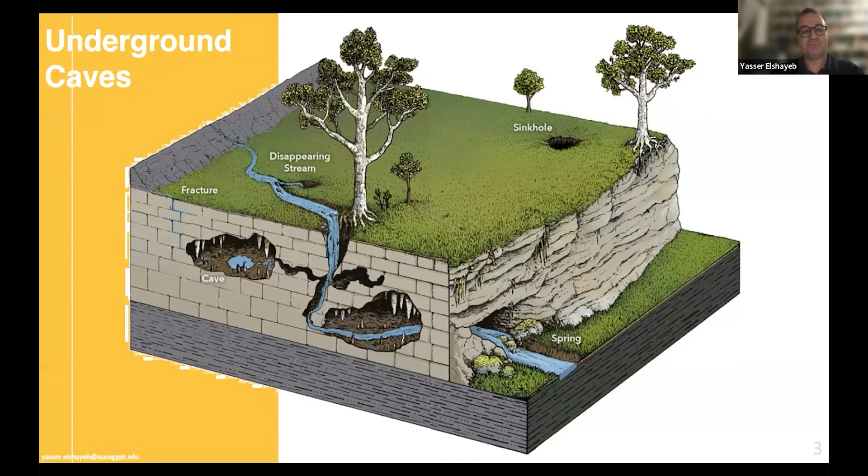There's nothing special about it, but the main characteristic is that it's done naturally. There are natural geological processes that lead to the making of caves. I'm putting some photos here, and if you've studied geology, you've probably heard of stalactites and stalagmites, which are calcium carbonates formed in those caves naturally with the effect of water.

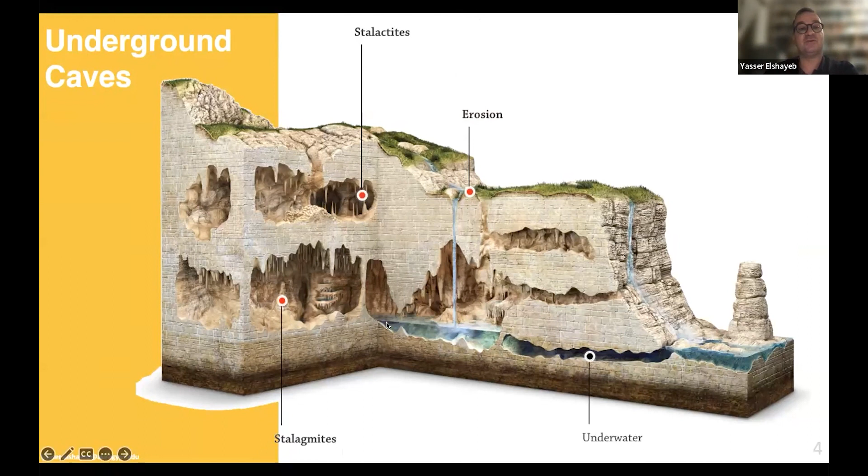I'll show you some real pictures of those stalactites and stalagmites from Egypt. This photo is taken in one of the caves we have in Egypt, in the governorate of Beni Suef, about 150 kilometers south of Cairo. This cave is called Sanur Cave. It's naturally formed, underground, and big, which is why I'm putting my photo here to give you an idea of the size of that cave.

Here I am standing inside that cave to show you the scale. You can see the stalactites coming from the roof, and the stalagmites from the ground. Actually, they're not coming from the ground - they form because water drips from the roof onto the ground, and while dripping, it carries small, nano-scale fragments of carbonates. Those carbonates are deposited one after another, and eventually you get this formation we call a stalactite.

Sometimes the water is actually dripping onto the ground, and when it drips there, the water evaporates or dissipates, leaving small portions of that carbonate material it carries, and it builds up until it forms that stalagmite.

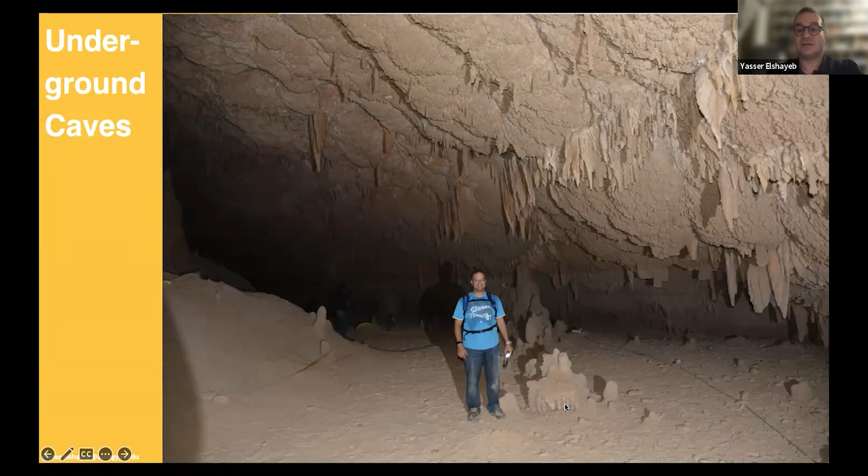I think I have another photo - yes, this is another photo of the same cave, and you see clearly the stalactites, and if you observe well below, the stalagmite. This is a natural reserve we have in Egypt. In other countries, like Lebanon, there's a cave called Jaita where you can go inside and look at it - there are lightings and a tour you can take, and it's really very nice to be there.

Again, I insist that it's always naturally done - it's not man-made at all. These are more photos from the Sanur cave in Egypt. We also have a phenomenon here called a sinkhole, where there's a cavity in the ground, and all of a sudden the bulk of the ground falls below. This can be very dangerous. Here, luckily, we're inside a cave in a remote area where no one lives, but sometimes sinkholes happen because of cavities and

they destroy homes and property. If you search Google for the word sinkhole, you'll find a lot of photos, many very frightening, big or small sinkholes, and it's actually problematic - it's a result of the existence of a cavity below the ground, so the ground just falls into this hole, if we can call it that.

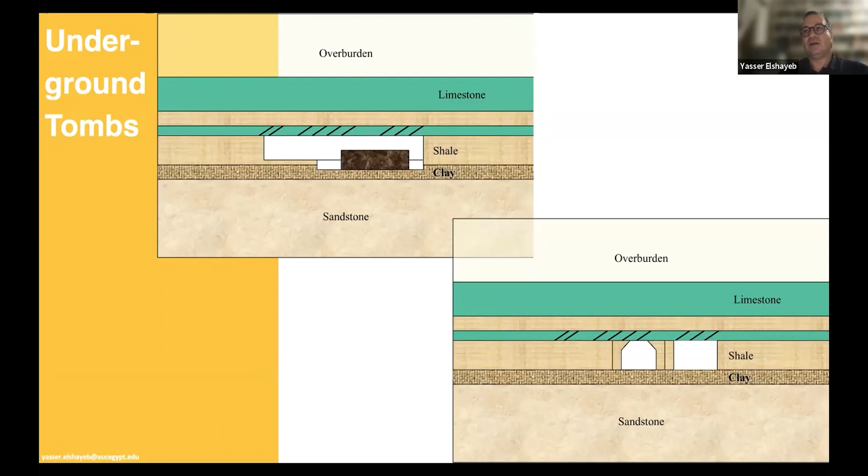So the main difference between a tomb, or cultural heritage tomb, and a cave is that the tomb is man-made. It has a definite structure, we know about its structure, while a cave is naturally made, so usually its structure is more or less following a random form, I would say.

Now, how to assess? This is another photo of a tomb in Egypt, and this is a third photo. As you can see here, it's going a little bit deep, and if you look here, this place is deeper than this place. Maybe it's like 30 or 40 meters below the surface. Nevertheless, it's still very stable, and people can go in and visit and admire the colors and the paintings on the walls, and so on.

Now, this is what exists, and this is the domain that I'll be trying to speak about today: how to assess the stability of those structures.

I've been into the Sanur cave, the Jaita cave, the tomb of Ramses I, Ramses II, whatever. But the question I usually ask as an engineer is how to assess, how to make sure that this structure is stable, that it will not fall on me, will not fall and destroy me, or kill me, or destroy anything that I put there.

It will not fall and destroy everything that is in there, and destroy the property and the paintings and everything. So this is the main question that we are asking.

If you remember the lecture from last time, we spoke about the problems facing structures. I'm putting here some of the elements that affect the stability of an underground structure. So we have groundwater, which definitely affects a lot the stability of the rocks around this opening. You have the joint persistence. You have the strength of the rocks that are around this opening.

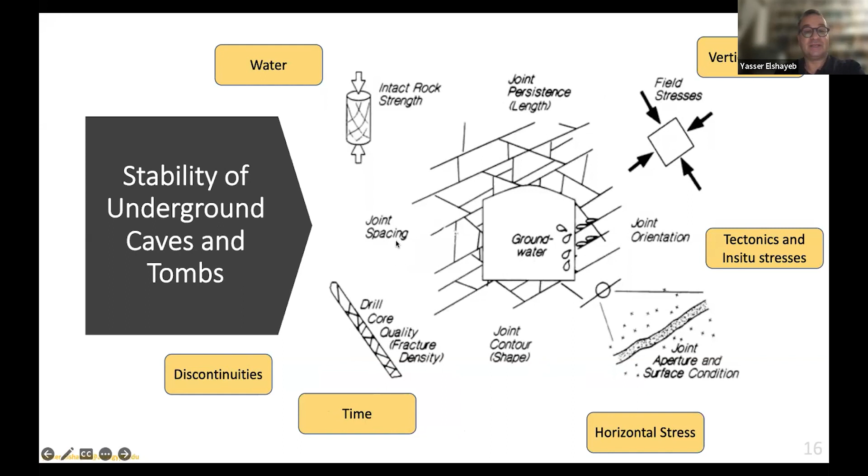You have the joint orientation, because if you have layers and joints that are inclined to the opening, it's more dangerous than layers that are more or less horizontal. You have horizontal stresses resulting from tectonic activities. You have generally the discontinuities of the rocks that are in here. And then you have also time, which I spoke a little bit about in the last lecture.

Now, another thing to consider when speaking about an underground structure is how wide it is, what is its height, and how far is it from the surface. So here we speak about the thickness of the overburden, which are the layers that are above this opening.

Sometimes we speak about underground structures that are 5 meters from the surface. Sometimes we speak about underground structures that are like 100 or 200 meters from the surface, and still we are able to build it and go into it.

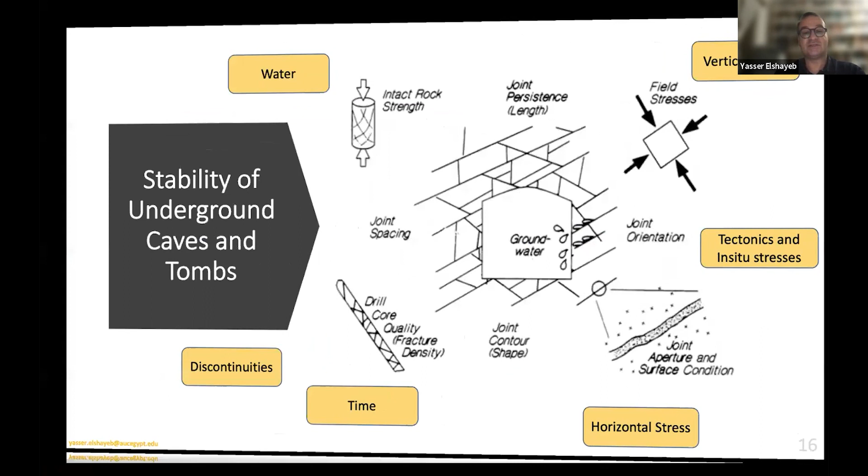Now, we need to consider as well the width of the cavity, or the tunnel, or the tomb, and also the height of that cavity, tomb, or tunnel, because all those parameters, in addition to those in the slide before, are actually affecting the stability of that underground structure.

And usually when you dig a tunnel or a tomb inside a medium of rock, you have stresses, you create additional stresses subject to this opening. And usually the question is, will this structure, without any additional support, support or bear the stresses or forces acting on it or not? This is actually the problem of stability.

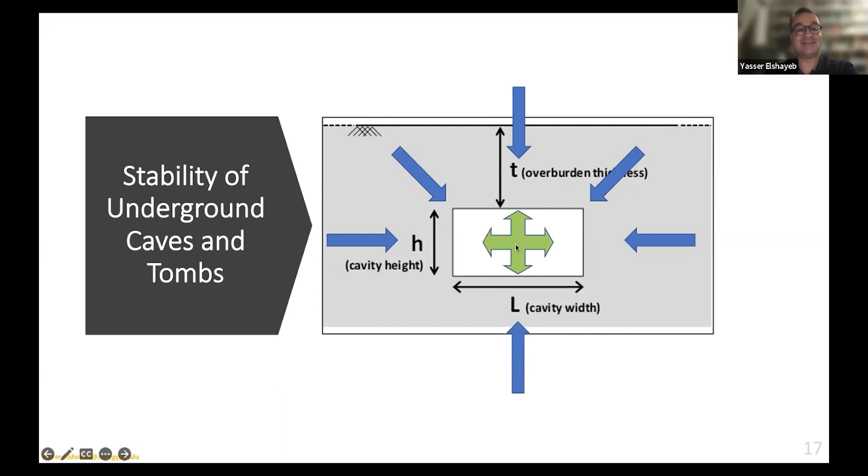So we're speaking about forces that are acting on an opening, and we're speaking about resistance that we put there, or the natural resistance or artificial resistance. And we need to make some calculations. So we need to calculate the forces, and we need to calculate the resistance that you are putting in that place.

When the force acting on the opening is larger than the resistance, this means failure. If the force is equal to the resistance, this means equilibrium, almost there. And if the force is less than the resistance, then this means stability. So those are the three cases that we usually have.

Since we cannot really control the forces that are acting on any underground structure, because it's nature, it's layers, it's the water that exists, it's the discontinuities naturally there, what we can actually control and try to enhance is the resistance. So if you find that the forces acting are larger than the resistance, you need to increase your resistance in order to make your structure stable. If not, you know that it will fall.

If you find that the resistance you have is naturally larger than the force that's acting, meaning the force is less than the resistance, then you have nothing to lose, nothing to worry about. It will be stable, there will be no problem. And this is actually what we use in the stability of those structures.

So you calculate the weight of this mass of rock, and this is the force acting on this opening. Now, if you calculate this, and you know how much the rock can resist, can support, can take on itself naturally, then with the difference between those two, you can work on the equation I spoke about before. Now you have the force and you know the resistance, so you can deduce if it will be stable or not. This is an analytical method invented by Professor Terzaghi in 1943.

Of course, it has a lot of details you can look at in the literature, to see how it is applicable. Now, this is a continuation of Terzaghi's theory: if the distance from the surface to the opening is higher than a certain threshold, then you don't actually calculate the weight of everything - as before, you'd need to calculate the weight of everything above the opening, with this inclination and everything. But this applies when the distance between the opening and the surface is empirically about 5 times the opening size.

So if the opening that I'm putting here is like 2 meters in height, and this opening is situated 10 meters below the surface, then I need to calculate everything. If this opening is 2 meters in height, but it is situated at a depth of like 50 meters below the ground, I will not calculate everything.

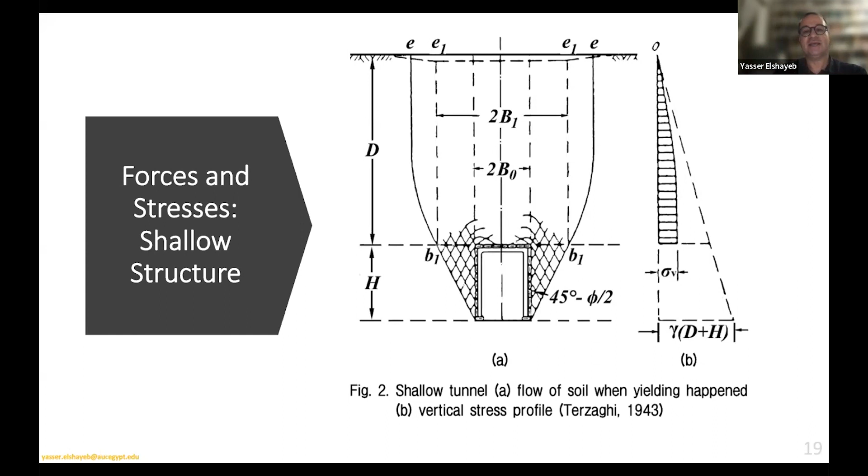So we have made some studies, we have enhanced this cone. It's actually not phi over 2, it's actually phi over 2.01 or something, because with time, with development of science, we are able to enhance those equations, and we are able to come with maybe better estimates of the forces and the resistance. But if you will calculate it with the cones of Terzaghi, you have a very good and fair information that you can really work with.

To be blunt, this is the result of 30 years of research separating Terzaghi, this one is 1973, from this one in 1946 or 1943, the one that was before. So in 30 years, we came up with an enhanced equation, an enhanced shape based on other research. And this is usually what happens in all fields of research. You have something that is very old, done in 19 something, and then with time, you make other research, you enhance the equations, you have better equations, and so on and so forth.

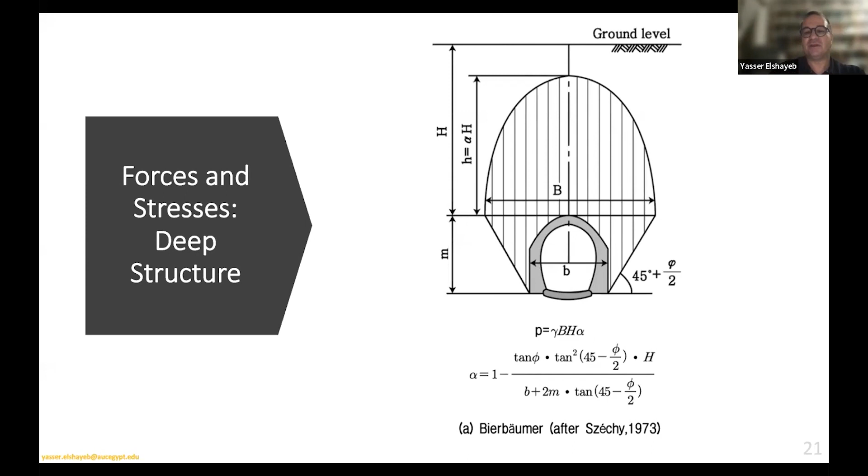So this is again the example of Széchy in 1973, cited by Bierbäumer. I think this paper is like 1980 something. And I'm sure that if you look into a book about rock mechanics and how to calculate the forces around an underground opening, published maybe in 2020 or 2022, you will find a slightly different equation than this one that is taking into account something more, and you can of course use it.

Now let me take you to look into some empirical methods and empirical models, because empirical models are easier to apply. You don't have a lot of mathematics to apply, and they are mainly based on experience. So you have very experienced people who have worked with underground structures, underground tunnels, underground tombs, underground temples, whatever, for like 30, 40, 50 years sometimes. And with their experience, they are able to derive some rules. That's why I call it empirical models, because you don't have a lot of equations into it with respect to what I've just shown you about Terzaghi and Széchy.

Now, the very famous empirical model for underground structures to calculate, to know if an underground structure will be stable or not, is a system that was developed in 1978, I think.

This was developed in the late 1970s by Professor Bieniawski from South Africa, who after 40 or 50 years of experience working with underground structures, derived this system called rock mass rating.

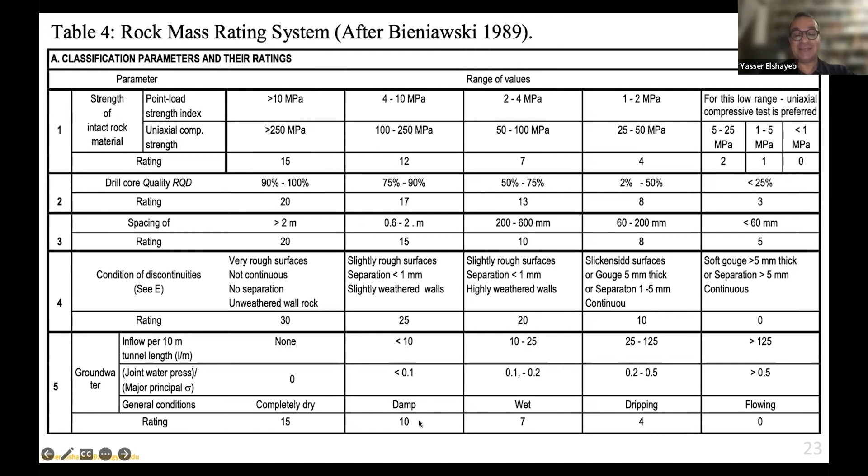Now suppose we had a rating of 12, a rating of 20, that's 32, then a rating of 15, that's 47, then a rating of 20, so 67, and then a rating of 10, so I arrive at the end at 77. So I calculated my rating for my environment as 77 rock mass rating.

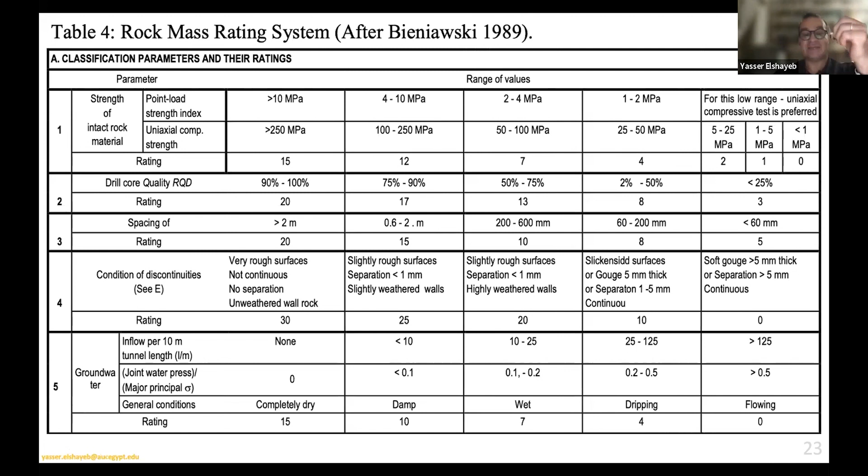So this 77 is a very important number that I will use in the slides that follow in order to know about the quality of that rock.

Here it says again, Bieniawski in 1989, that if your rock mass rating is between 81 and 100, we call this a very good rock. If it's between 61 and 80, like our case was 77, we call this a good rock. So what's a good rock? It means that if you have an opening of 10 meters width, you can advance this tunnel about 1 to 1.5 meters, and it will not fall.

It will just stay as is. And if you want to make rock bolting, then you can make support for the roof every 2.5 meters.

We also have this graph that says how much time my opening will stand. So if my rock mass rating is 77, as we spoke before, this is 60, this is 70, this is 80, so 77 would be like here. You draw a dotted line like this, and it will tell you that with an unsupported span of about 20 meters, it can stand for 10 to the power of 4 hours, which I think would be like months or something. So this means you can have an opening about 20 meters in width, and it will stand alone without any support for like months. Of course, if you want it to stand more, then you need to support it more.

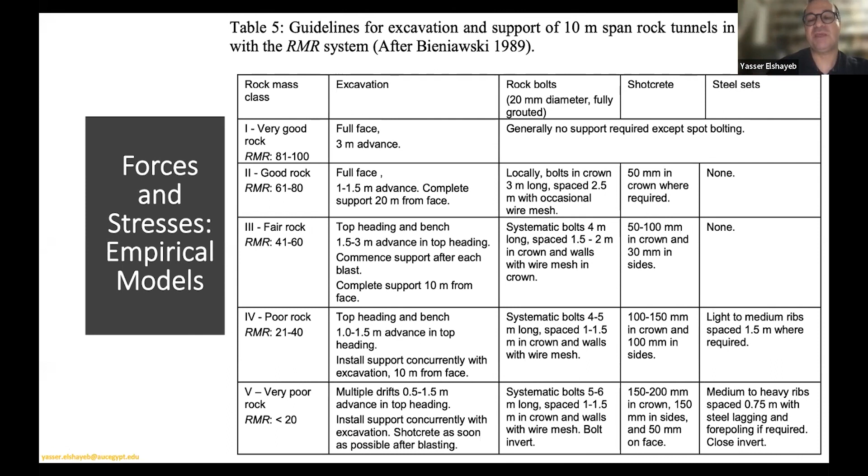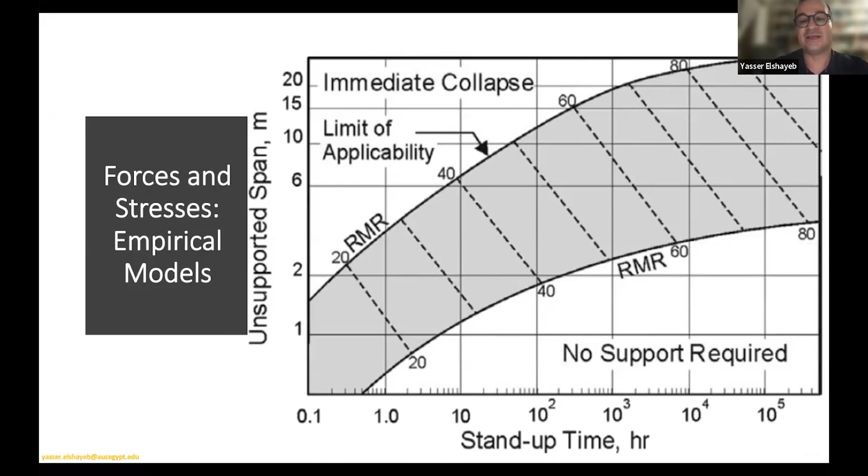This was Bieniawski in 1989, or 1985. From 1985, 1989 until now, a lot of enhancement has been done to this methodology, but it stays as one of the very established tools to assess how much time the rock mass will stay, and how big a span I can make in this place.

This is a different system established by another professor called Barton, who also established another system called the Q system. But it's the same idea - you make some calculations, some ratings, and when you have this Q rating, you can know if your rock will stand for how long, and under what conditions. Again, all of this is based on experience, years and years of experience. No equations behind it like Terzaghi or Szechy before, but here you have a lot of experience put into it.

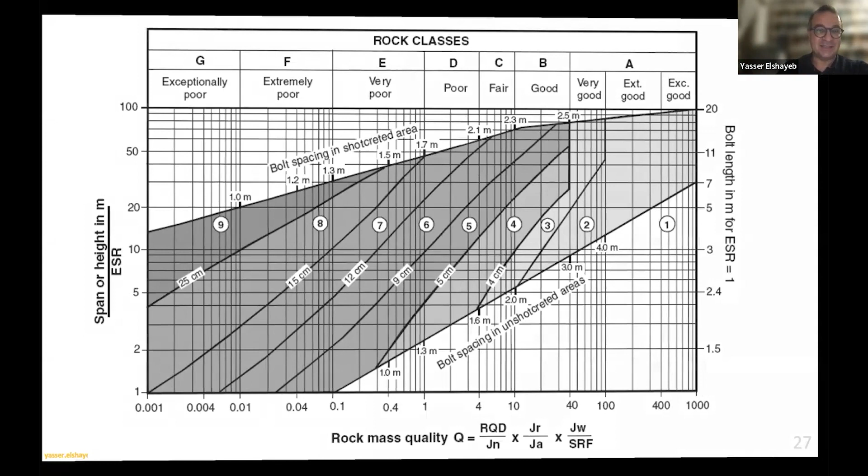Now, with the advancement of computers - personal computers in the 1980s, or even computers in the 1970s, and then the 1980s, 1990s, 2000s, and today - we started relying on numerical methods. We thought, why don't we calculate everything numerically, the stresses and forces in a numerical way? And this is actually what we do today. Most people today work with numerical methods. Here I will show you two main numerical methods.

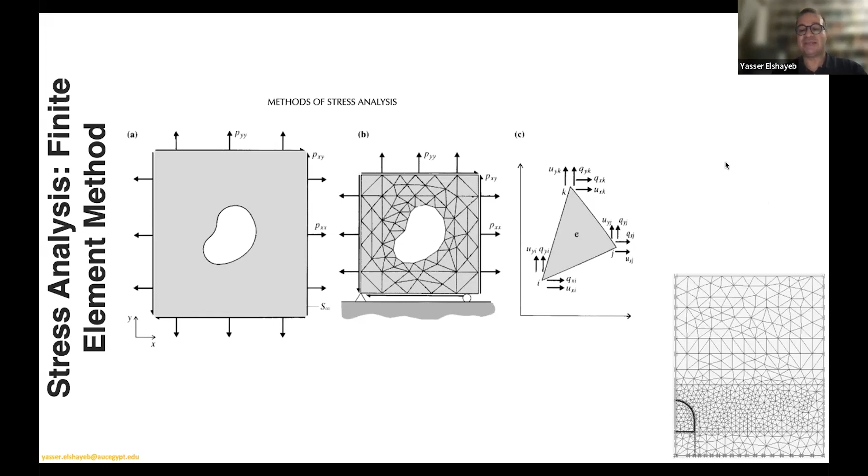Maybe you've heard of one of them, the finite element method. It's very widely used in mechanics of materials, because it assumes that the whole rock mass is a continuous medium. That's why it's used in mechanics, because everything is assumed to be a continuous medium.

So you have an opening like this, subjected to forces coming from the boundary conditions. You divide this medium into small pieces, small elements like this one - that's why I call it the finite element, because it goes into very small elements. Numerically, for every element of this medium, we start calculating the forces and the stresses.

So we take every one of those small pieces, here and there and here and there, and we start calculating the forces and the stresses. Once you calculate it for this element, you go to this element, and you go to this element.

So you are calculating the forces acting on this element from everything around it. Then when you calculate for this one, you take into consideration everything around it, and this one, and this one, and this one. You finish the first round, then go to the second round, the third, the fourth, and so on, until you reach the outer boundary conditions.

From this, you can have an idea about the state of stress here, the forces acting on this opening. As I said at the beginning, if you know the forces and you know the resistance of your rock, you can know if the force is more than the resistance, then it will fail. If the forces are equal to the resistance, it's equilibrium. If the forces are less than the resistance, then it's stable. And this is actually what's done.

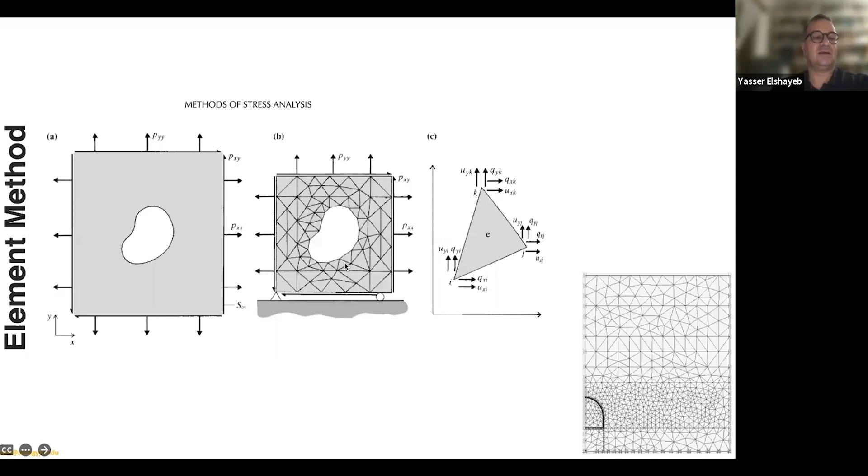Now, in rock mechanics, we know that we have a lot of discontinuities, a lot of fractures, a lot of layers geologically, a lot of discontinuities and so on and so forth. That's why a lot of people use the finite element method, but I think it was in the late 1970s where a group of researchers in Minneapolis in the US invented another methodology called the distinct element method.

And there are softwares that can do those calculations. The distinct element code or method acknowledges the fact that natural mediums like rocks are full of cracks, full of layers, full of discontinuities. So what they do is treat every block or every element separately. That's why they call it distinct element. You would call this element a distinct element.

It has a size, length, width, and depth, and it also has forces, and it has resistance, and so on. Then we start studying the interactions between those elements together. So I have element A and element B, and I'm studying the interaction of element A and B together, and then element A and C, and so on.

I'll take this element here and study the interaction between it and all of those around it, and this element and all of those around it, and so on. Those interactions are usually either compression, like they are pushing against each other, or they are separating from each other, like tension, or they are moving in shear with each other, or a combination of the three. So there is tension, compression, shear, torsion, and so on.

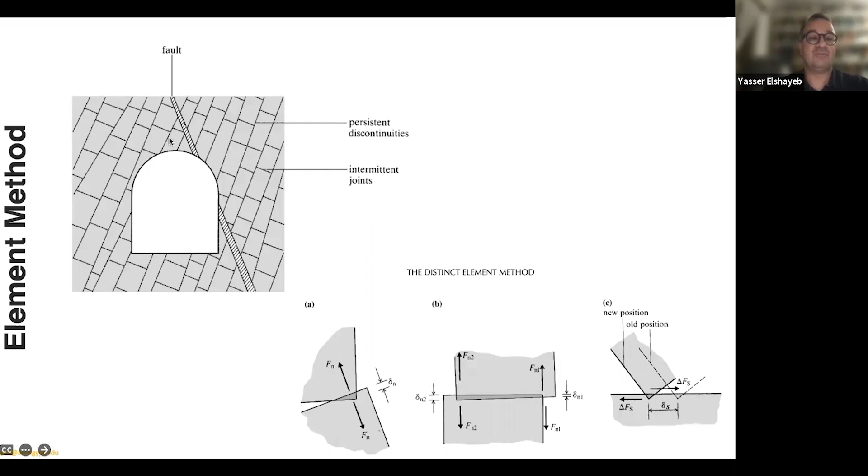So I'll take every element and try to study its interaction with all the elements around it and how it is affected, and then I'll be able to calculate all the forces acting on my opening that is here.

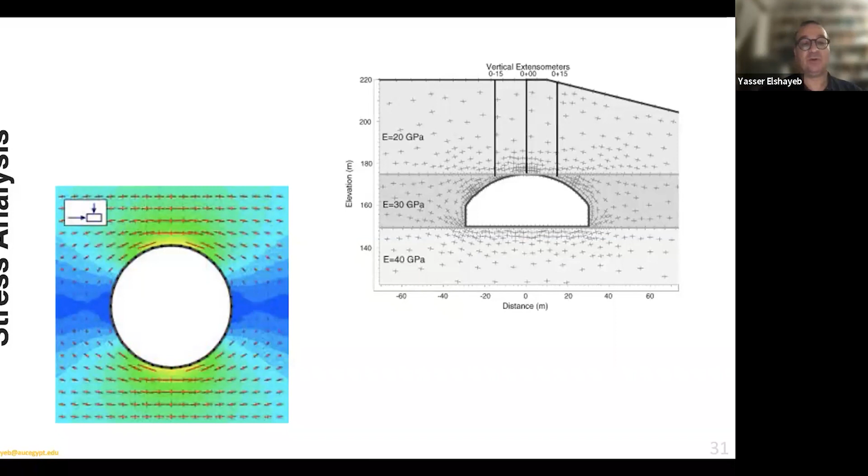So we get the direction of the stress, we get the amount of the stress, we can see it here, and then with the amount and direction of the stress, we can design the support that is needed, or we can actually calculate if it will fail or if it will not fail.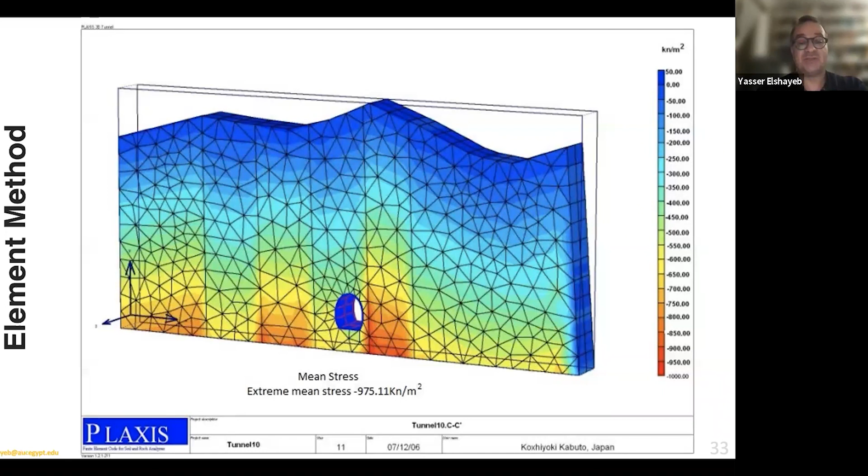If we speak about this, this is again finite element code. Sometimes we do it in 2D, sometimes in 3D, with different software. Here there's a software called Plaxis, and there are others, I'd say 10 or 20 software that can do this. You can also fabricate your own tools.

This is what we do when we design a support system. In this opening, we designed a support system that is roof bolting, and with the roof bolting we recalculate everything again to make sure it is stable, that the displacement will not go beyond something acceptable.

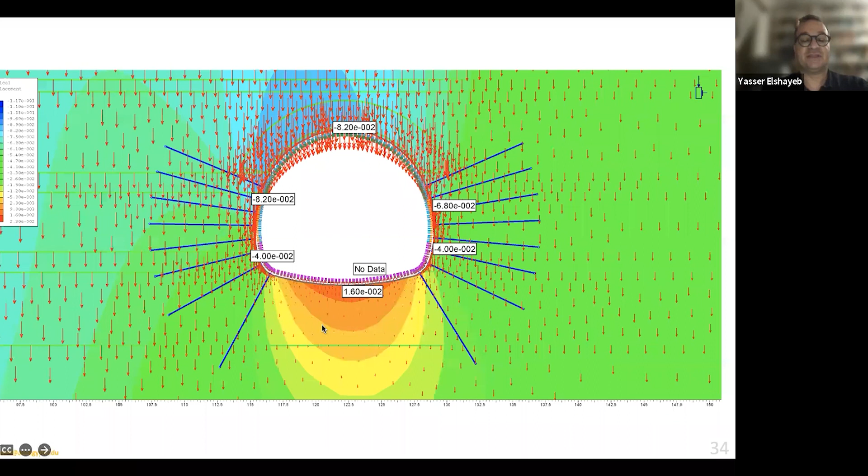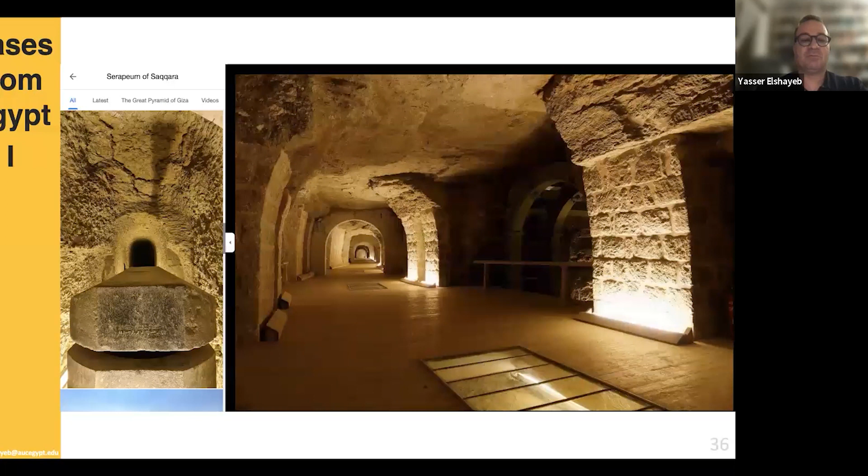Now maybe I'll go quickly to the cases, because last time, on Monday, I spoke about the case of the Serapeum, and showed some graphs which we can see here again. This is the Serapeum tomb in Saqqara, Egypt. These are calculations done with a universal distinct element code software, and you can see here that we have different blocks throughout the structure.

With the calculations you can have two, or actually more than two, main results. First, you can get the direction of the stresses, because if you want to design a support system for this tomb, you need to know where the forces are coming from. If you know where the forces are coming from, you can put your support system directly against that force.

So that's one thing. The other thing is the amount of force that is acting. And the amount of force, as I said at the beginning, you calculate the resistance of the rock, or the additional resistance that you'll put, and you ensure the stability.

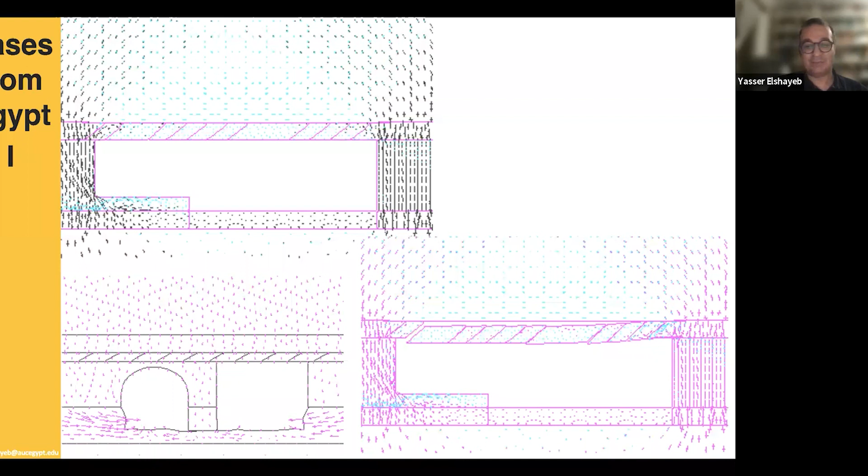The third thing we get from such a study is that we can know which blocks will detach first. So if you have an opening like this, the study will show that the first block to detach is this one, then this one, then this one, and so on. So if you want to design a support system, I would advise focusing on this block here. You just support it with a roof bolt or an anchor, and it will stop, and everything else will remain stable. This is an advantage of this approach.